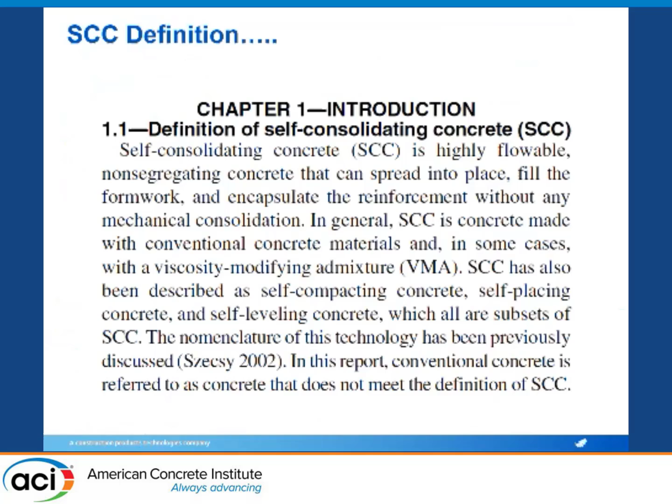If you vibrate SCC, is it still SCC? So is it self-consolidating if you vibrate it? Well, no, of course not. Actually, that's an April Fool's joke because of course it is. It's still self-consolidating concrete. If I'm placing 25-inch slump flows and I vibrate it, it's still self-consolidating concrete. You can't convince me otherwise.

You can try. So if you're driving or in a self-driving car and you take control of it to avoid a crash, is it still a self-driving car? I'll let you ponder that question. And by the way, if that's me in a self-driving car, I'm not going to be that relaxed. I don't like riding with people. I'm pretty sure I can't do a self-driving car.

All right, so the rest of this is going to be a lot of pictures and some videos. I'll warn you when I get to the videos that there will be sound, so don't have your speakers too loud because you'll hear some vibration going on. I do have a lot of pictures. I'll be talking through the pictures and explaining a few things.

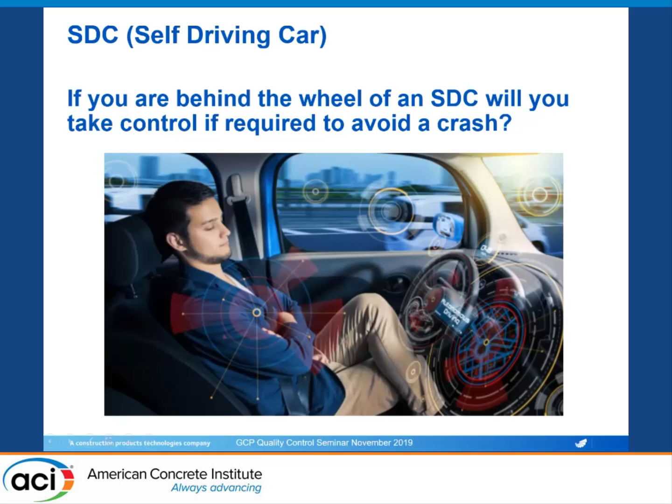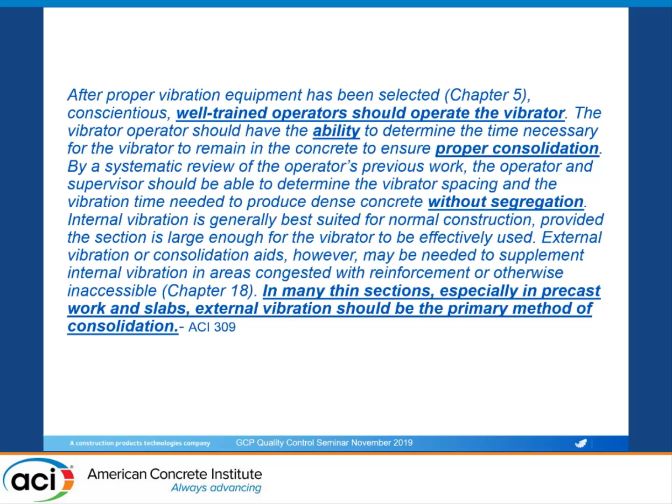So doesn't that apply to both self-consolidating concrete and regular slump concrete? I think it does. We see some more information about vibrators here. And then in many thin sections, especially in precast, external vibration should be the primary method of consolidation. I would agree with that. I think there are certain reasons or cases to use external vibration instead of internal vibration. We'll talk about that a little bit.

So let's get talking about precast. There's a lot of different things that are cast in precast. You have very simple things like traffic barriers. This would probably be placed without consolidation because there's very little reinforcement. They're typically not too worried about the surface finish.

Manholes and catch basins, in my experience, this is about 50-50. Some plants will vibrate this, most with some external vibration, some will not. And it's not tied necessarily to the reinforcement or the form or even the slump flow. I think it's more about, as Joe alluded to, and I was happy to hear his presentation, a 25-inch slump flow with a very slow, creepy flow is a lot different than a 25-inch slump flow that gets there really quick. So the viscosity of those mixes plays a huge role in whether it's being vibrated or not.

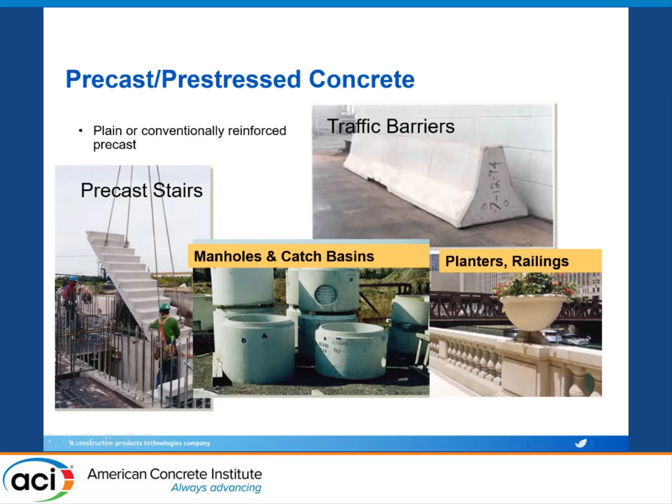Modular prison cells - this is an interesting story. These cells are very uncomfortable, but they do not place them vibration free. However, they went from doing about 15 to 20 minutes of vibration on these units when using 7 and 8 inch slump concrete to now vibrating for about 20 seconds, all external vibration. They need that external vibration to get the finish they want and make sure these corners are completely closed in around the window inserts.

So this is vibrated, placed at pretty high slump flows, 25 or more, and they still use some external vibration. Wet cast pipe is all over the place - you'll see some that use no vibration, some that use internal, some external, but it is all over the place.

The septic tanks and utility vaults are pretty simple construction, and typically if they're using self-consolidating concrete, they are not vibrating these. You do see it occasionally.

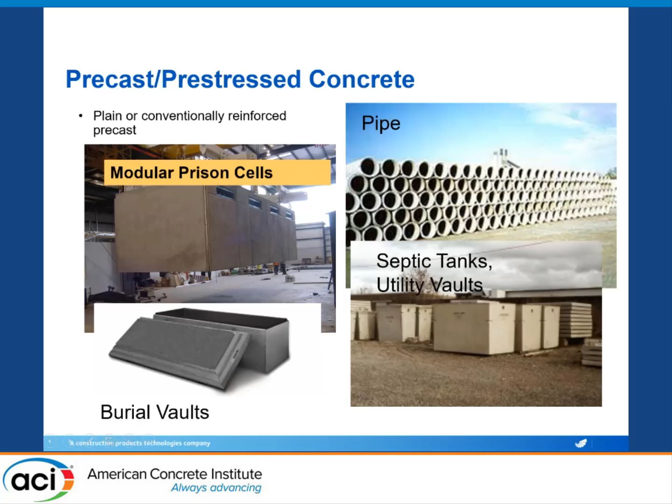Burial vaults are also pretty simple. They like to get a good finish because they look good, but most are not willing to avoid using excessive form oil, so they still get bug holes. They also tend to vibrate this some, to get very sharp edges, and these are placed typically at very high slump flows.

Wall panels really depend. If it's a typical gray panel, it may not get vibrated, probably will not. If it's architectural, it will - I have pictures of those.

Box culverts are very similar to the manholes - again, it's a bit 50-50. You get some vibration depending on the viscosity of the mix, not necessarily the slump flow of the mix.

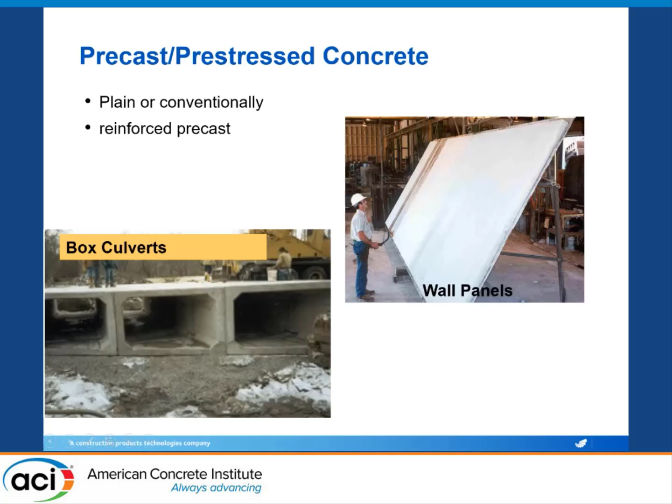This is interesting - I've forgotten the name of the bridge in New York. These were cast in Virginia on the shore, and these huge sections were barged upriver to go into place on the bridge. This is a complete segment, and these are massive. This used self-consolidating concrete, but they did vibrate - high strength, really good finish, lots of rebar in these, as you might imagine. Frankly, I think these are the largest precast segments I've seen, so this was definitely vibrated.

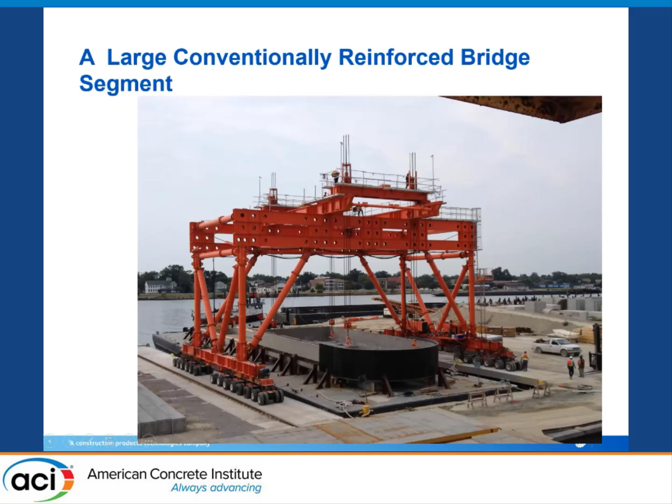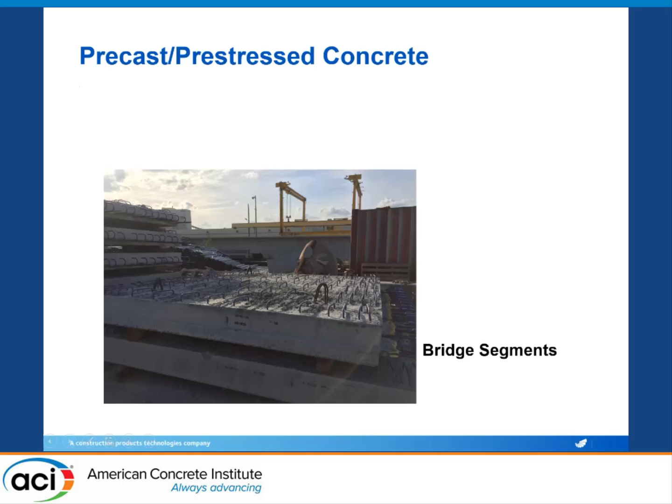Bridge segments, again, are pretty simple construction. For the most part, not vibrated - they're not too worried about the finish since these are going to get a topping after the fact. So all they need is enough slump flow to consolidate around the rebar, and it's not too heavily reinforced. So typically not consolidated, but not always.

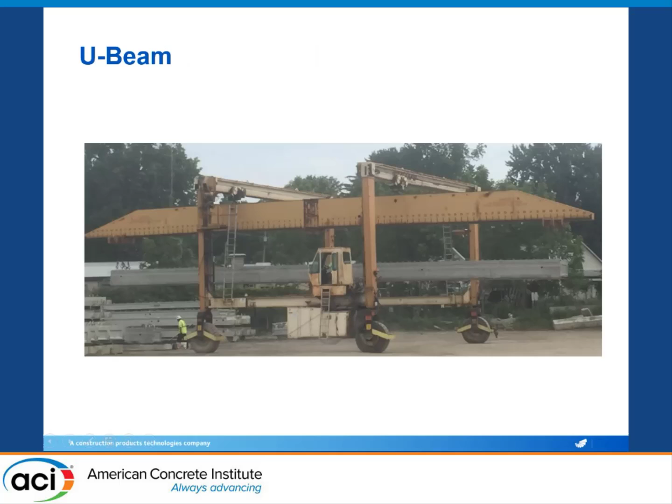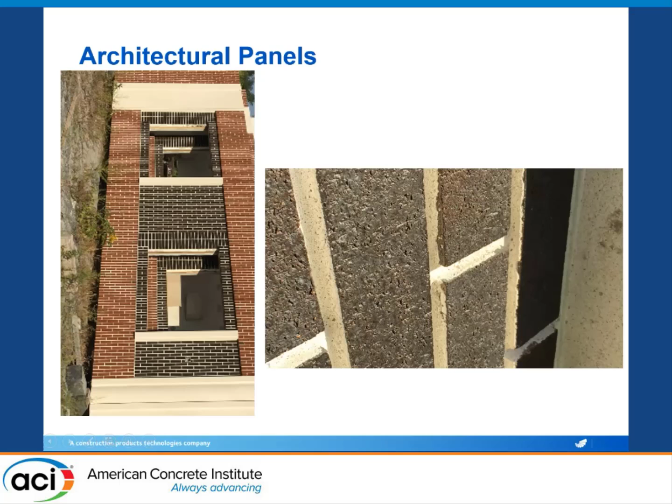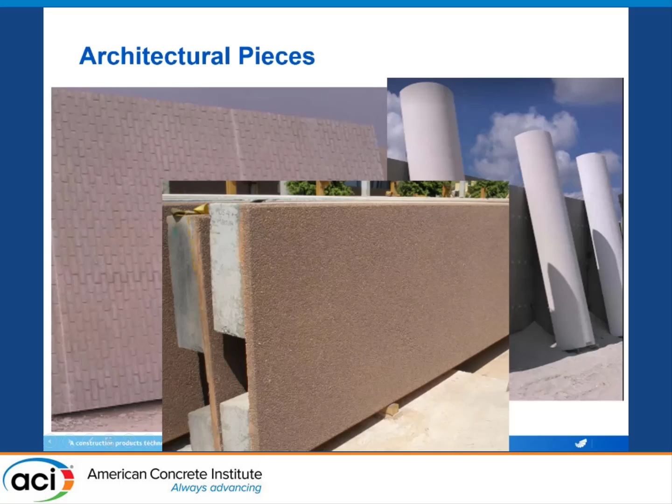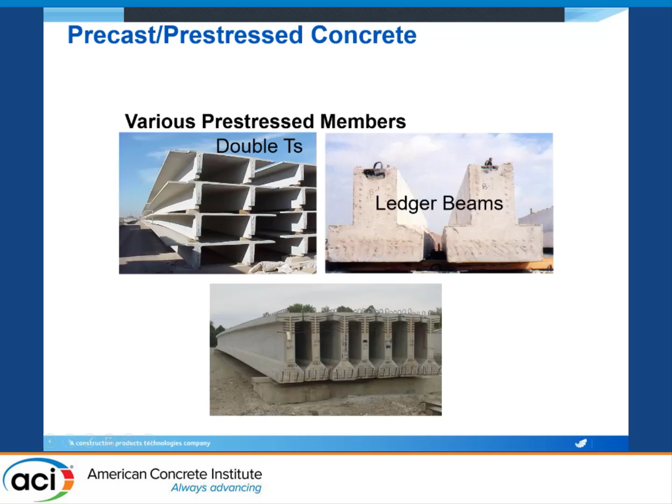Some of these - and Shelly, this is interesting - some DOTs require vibration, which is an interesting dynamic. Other DOTs, I won't name them, don't allow SCC. So they measure slump, but the slump might be 9.5 inches, meaning the slump flow is in the 22, 23 range, but they still require it to be vibrated. Again, it's kind of interesting.

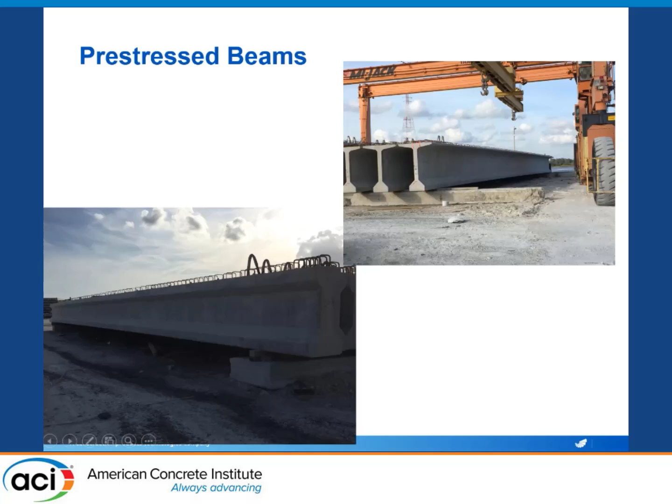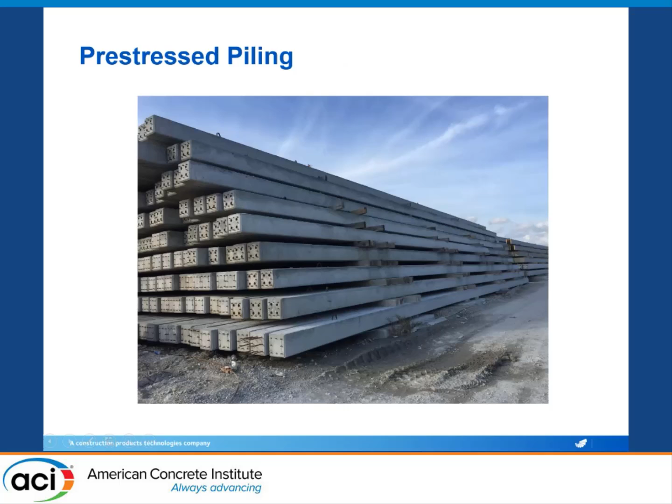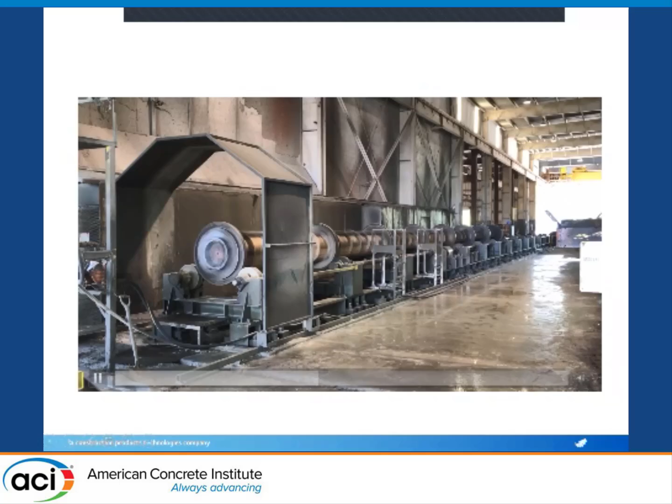If you've never seen a spun pole plant, it's worth a trip.

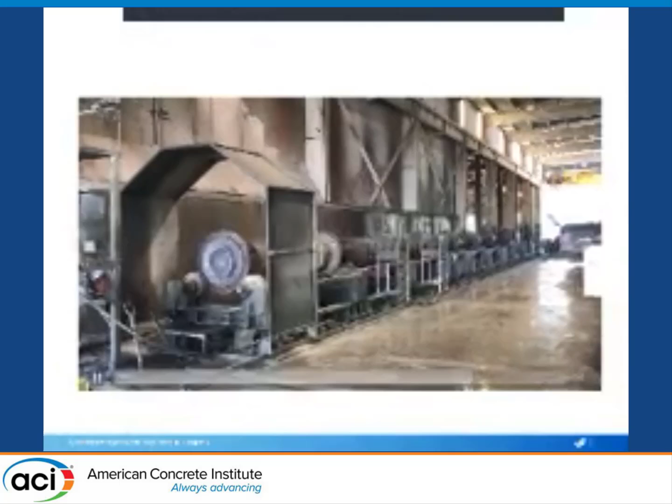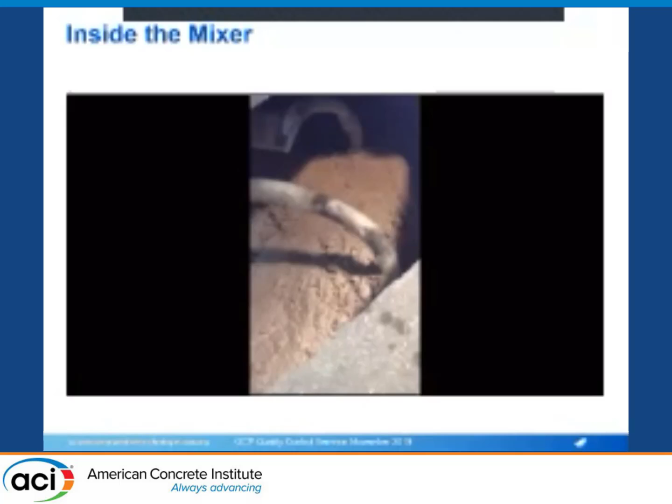This is a video inside a mixer, again about a 23, maybe a little higher, slump flow, not being consolidated. But I wanted to point something out since we're all technical people and like technical stuff. Notice this is a pan mixer, and right next to the hub it doesn't get mixed.

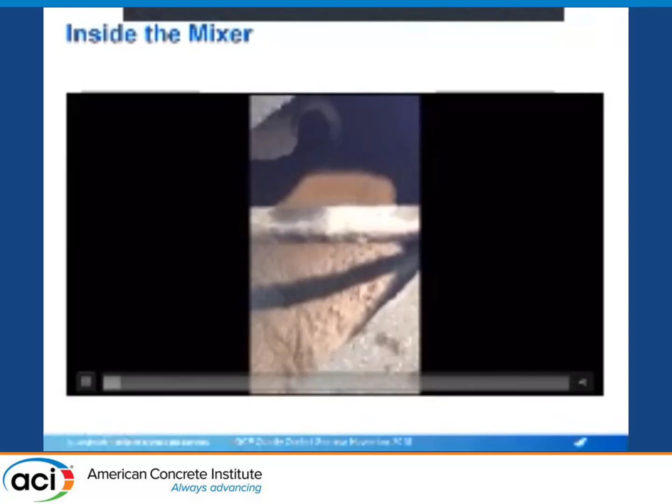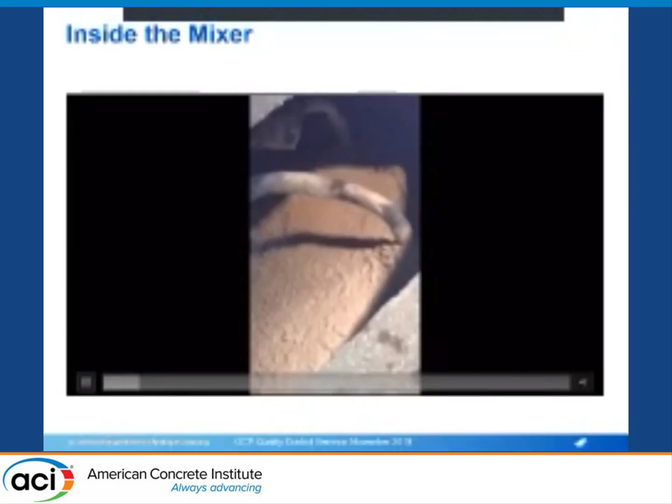So very fluid concrete, very nice looking SCC, but next to the hub it's not mixing - they need to fix their wiper blades here. So when this goes in the form, the vibration is going to help take care of that. Now, I don't recommend vibrating to cover up for inefficiencies in your mixer, but it's just something I wanted to point out.

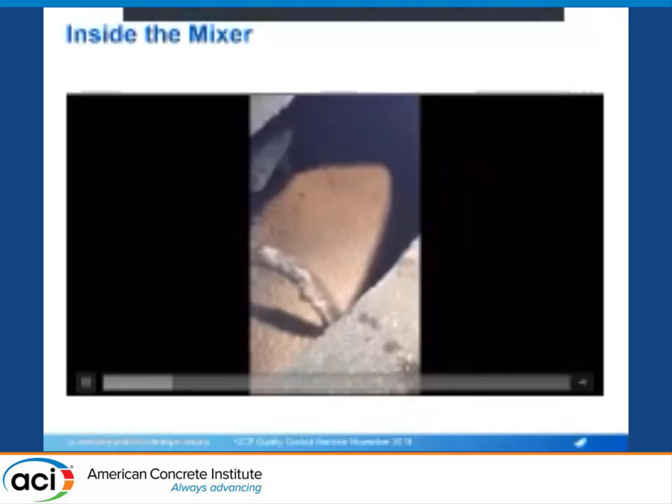Yes, this is a very cool video, and it is in slow motion. I'm not going to show the whole thing, but you get the idea.

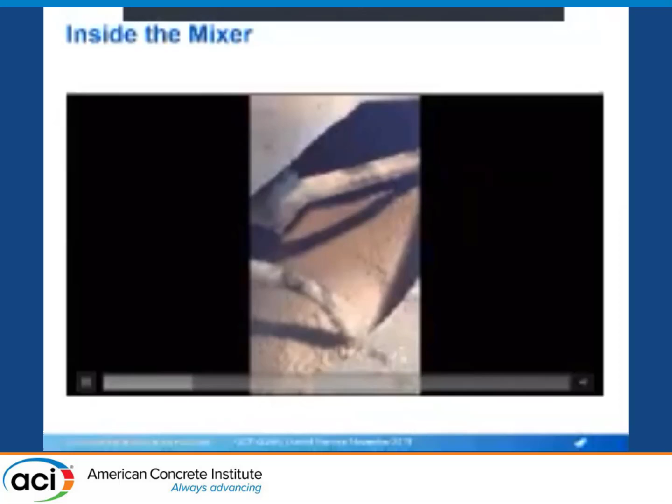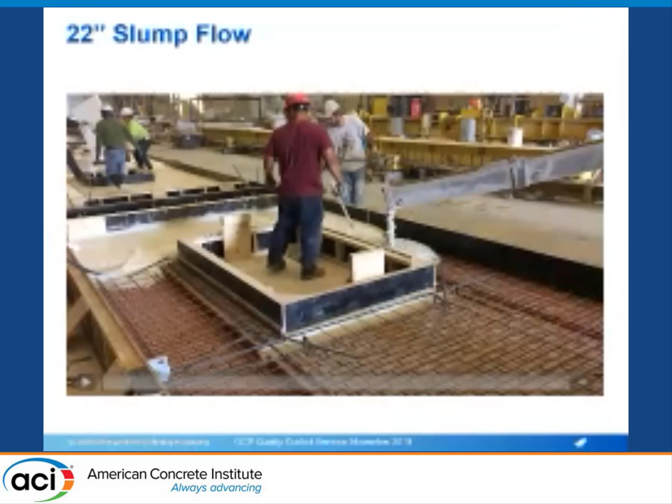This is one of those architectural panels we talked about, and you can see the brick insert here. This concrete, again, is less than 24, probably in the 22 to 24 range. And you're going to see what might be considered bad vibration practices.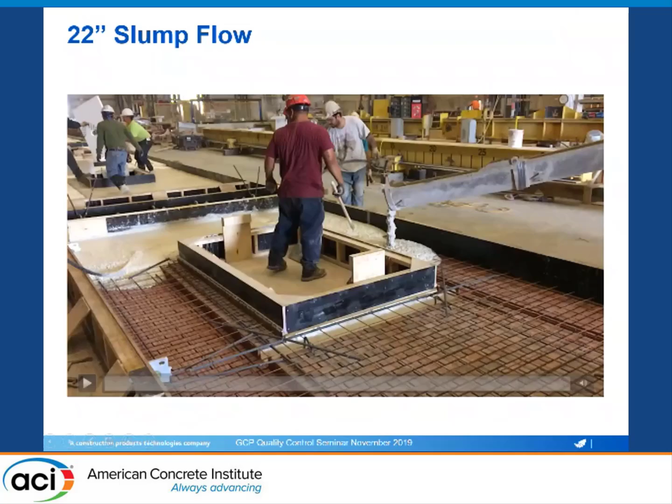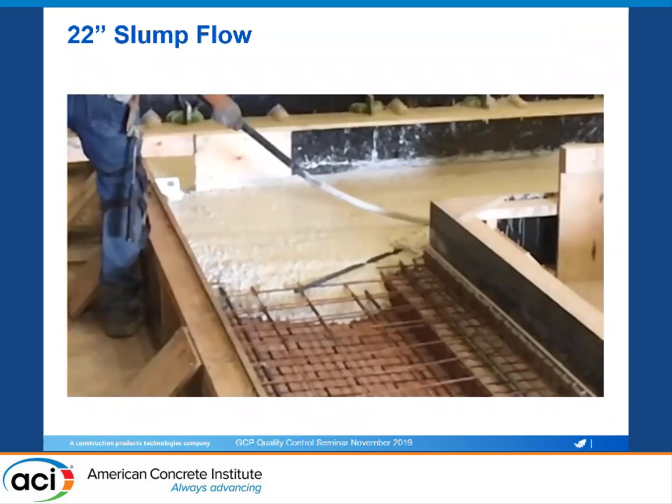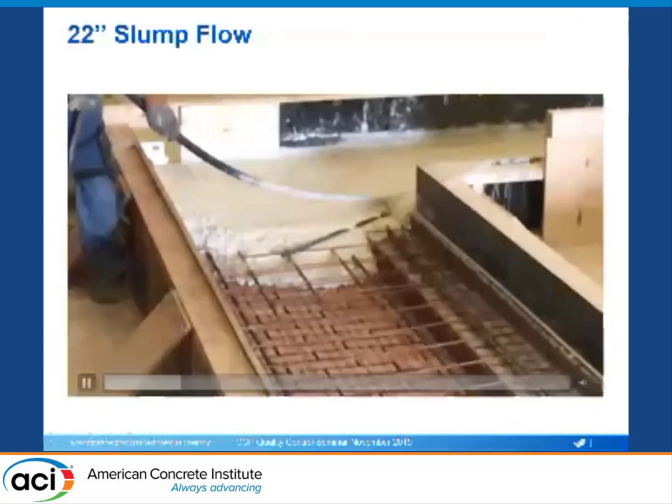Notice the sound of the vibrator. So they're going to put concrete on top of this, that's why they're screeding it down. It's going to get a great concrete backing. They're vibrating this because they want to make sure the paste, the mortar, gets into those joints. I'm not going to show the whole thing, but you can see the viscosity of this mix is pretty high because it's clinging to the screed board they're using.

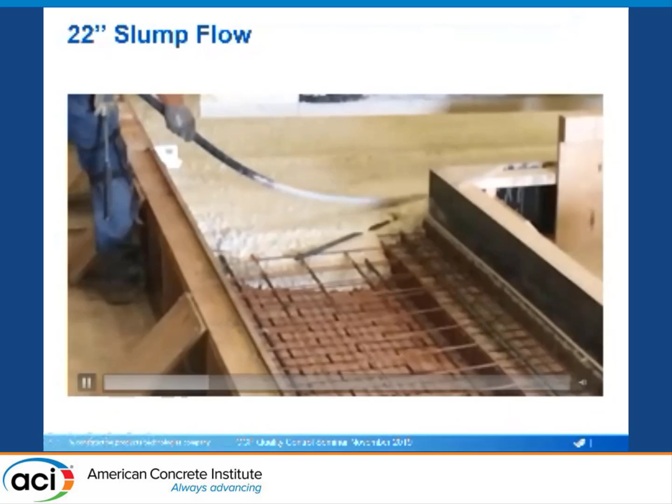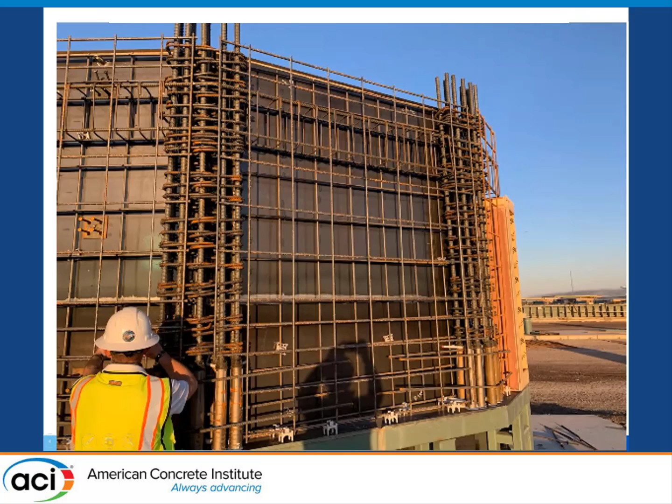This is a segment for an air traffic control tower in a precast plant. These segments are going to be placed, and you'll see there's a lot of rebar in the corners. This is about 800 pounds of powder in this mix. The concrete you're going to see placed has about a 25-inch slump flow, again about 800 pounds of powder. They do vibrate it. Not the greatest video, you probably can't even see the vibrators on the form, but this is form-mounted external vibration during the placement.

Really pixelated here, I apologize, not a very good video.

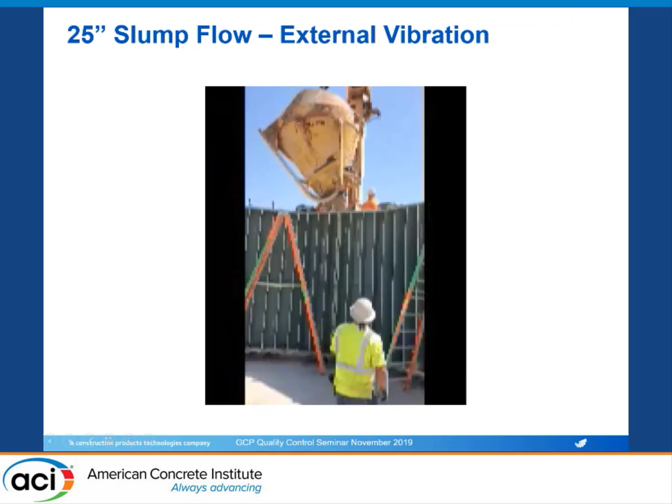Again, note the sound of the vibration.

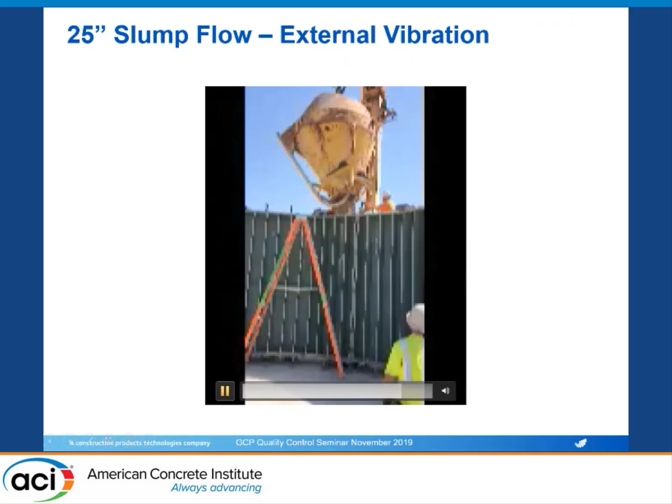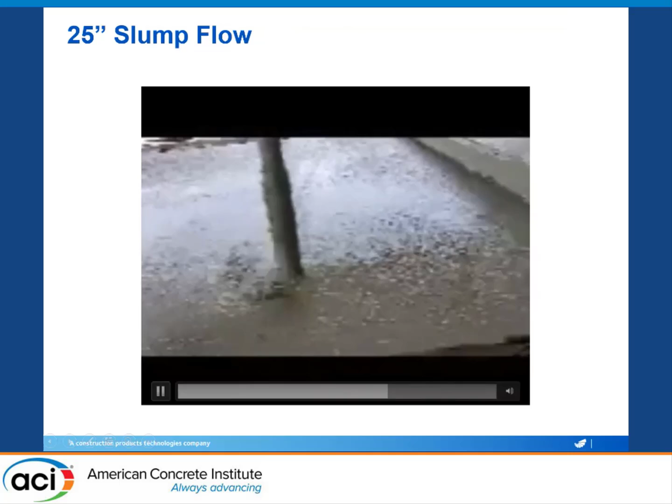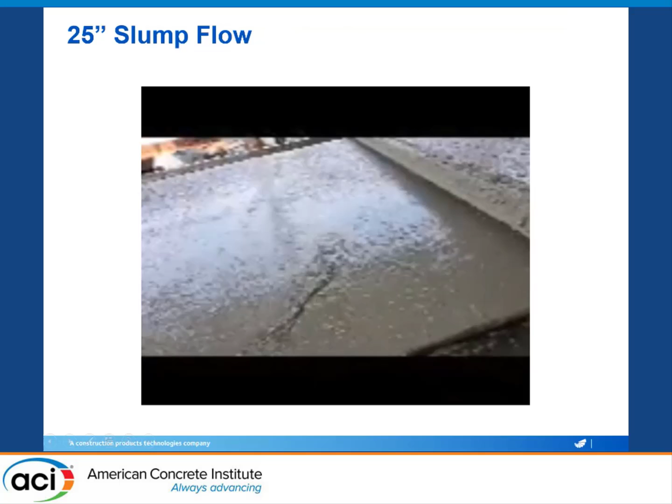Really flowable SCC. This is just what it looks like.

This company's foreman on the crew decides if they're going to vibrate a load or not. They tend to vibrate most of the loads. If they have one approaching the 30-inch slump flow, they're probably not going to vibrate it, so you're going to see a piece of rebar sticking out.

Terry, can we finish it in a minute? Terry, can we finish it? It is 5 minutes after 6, can we wrap it up? Yes sir, I think this is my last video, I've got a couple of slides and I'll be done. Oh, thank you sir, thank you.

So this is vibrated. This section is not. You really don't see much of a difference.

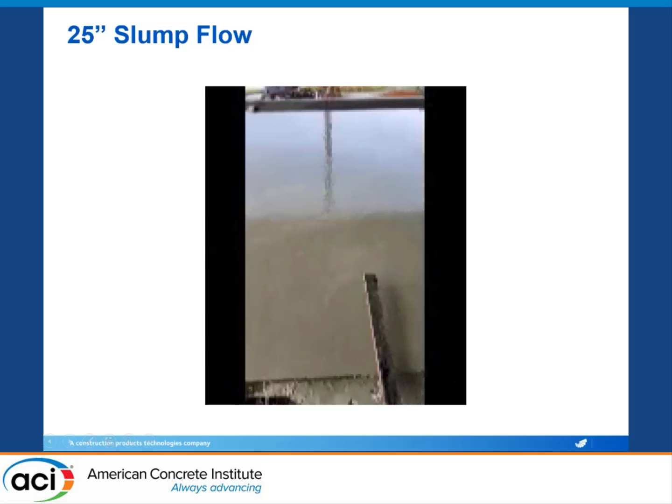Okay, so concrete vibrators. This top part is out of 309. Essentially it's a rapid motion transmitted to the freshly placed concrete, described in terms of frequency, the number of oscillations or cycles per unit of time, and amplitude, the deviation from the point of rest.

Higher frequency tends to move the paste and brings aggregate with it. When listening to the vibrator, the higher the pitch, the higher the frequency. Those high whine sounds tend to be higher frequency vibration, and that's what you want when vibrating SCC. The amplitude tends to move the aggregate, and for SCC mixes, a high amplitude, low frequency vibrator will probably give you issues with segregating the mix. That's a real quick lesson on vibration.

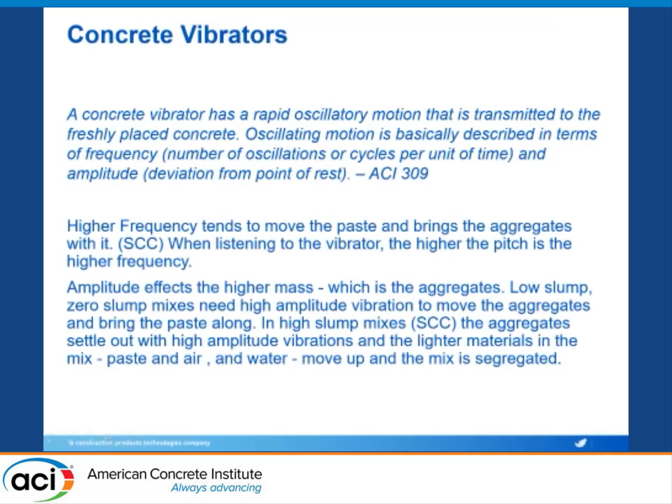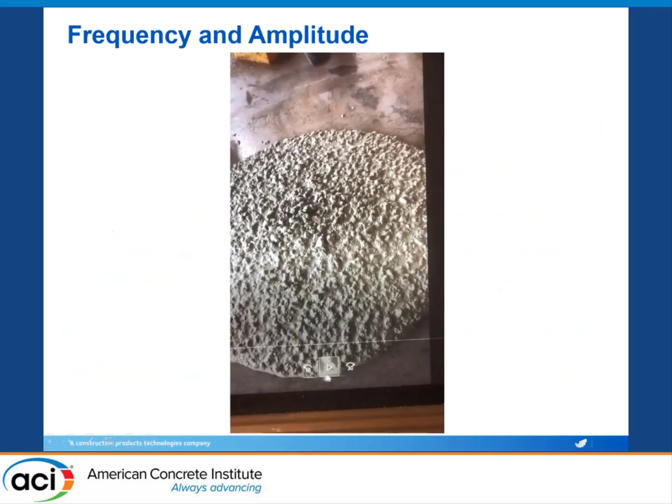This is an example of frequency and amplitude, hopefully you get this. Some of you were on this, and thanks to Bernie for the amplitude demonstration. Now the frequency is increasing and the amplitude is decreasing. He's hitting it really hard, really far apart, then not as hard and closer together. This is actually a test that this precast company does to determine if the mix is good, before they vibrate it.

Because they're going to vibrate it, I thought it was interesting.

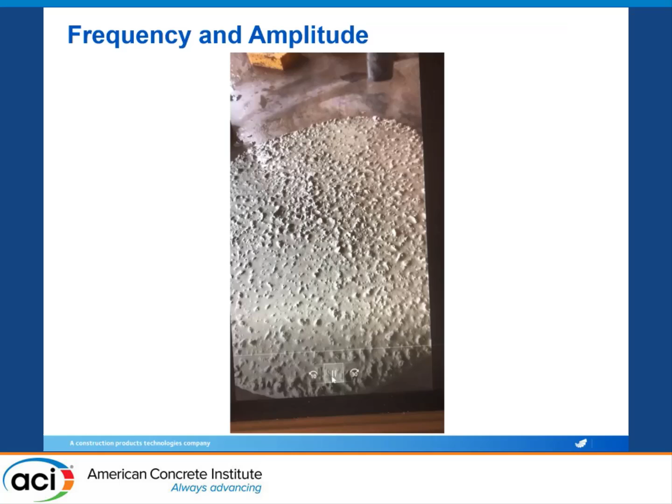Thank you, Terry. Thank you, Terry. Can we conclude this? Yep, my last slide. So, thank you so much.

And I'm done, Shelly. Yes, yes. Thank you.